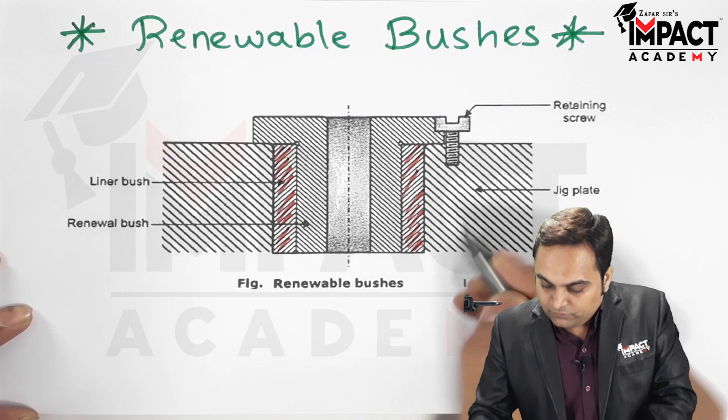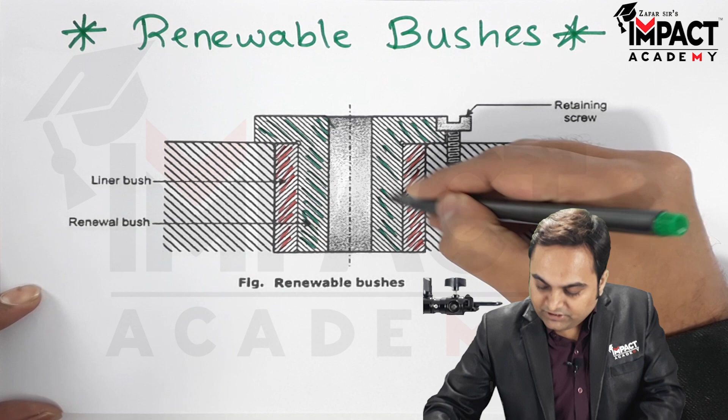Now liner bushes are permanent bushes. So these are the permanent bushes. Over that we are having the renewable bush, as we can see here. These are the renewable bushes. And the renewable bushes are made up of softer material compared to the liner bush.

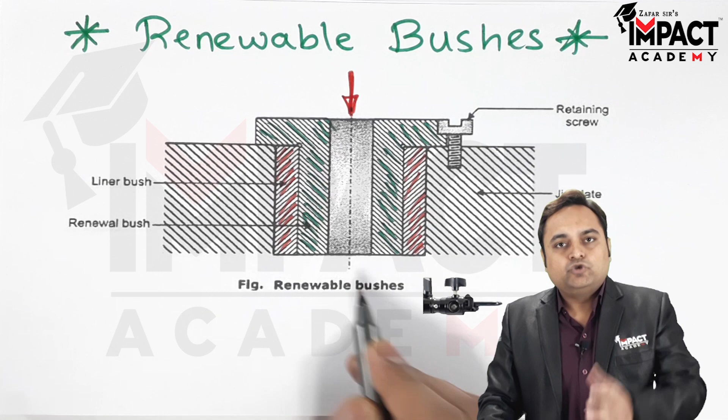For example, they may be made up of bronze. The function of the bush is to guide the cutting tool, so it would be guiding the cutting tool or the drill through it, and when the hole gets drilled in case of mass production there is severe wear and tear of this bush, so we require easy removal of it. That is why we are having the renewable bushes.

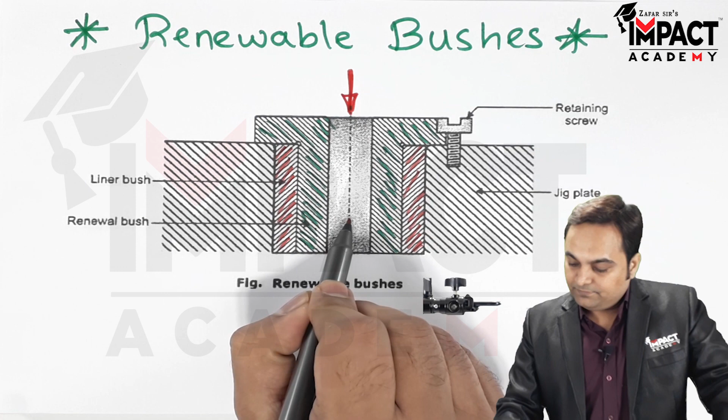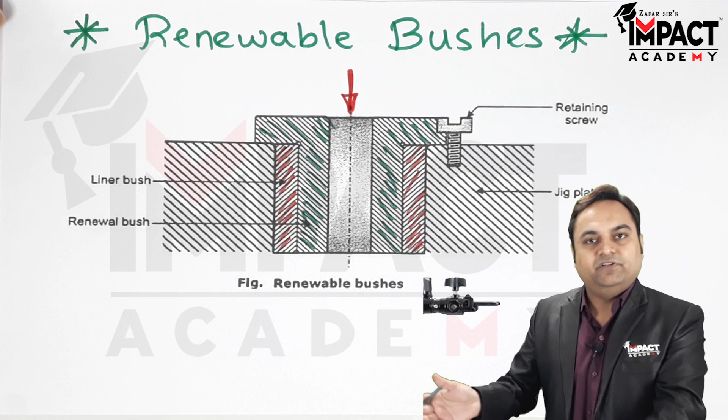With the help of the retaining screw, we can avoid the rotation of this renewable bush. At the same time, we can avoid its upward movement, and for easy removal we are having the retaining screw, so that after one of the renewable bushes gets worn out, we can replace it with another without damaging the liner bush. So in short, that was an explanation regarding the renewable bushes, which saves a lot of time during the manufacturing or production process.